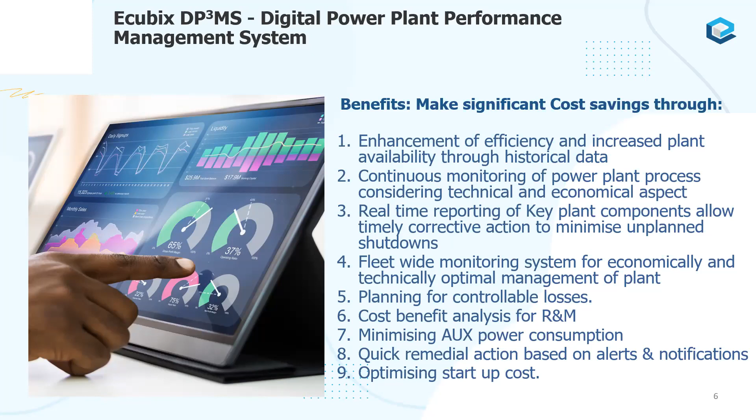Coming to the similar thing, if I present on the basis of departmental wise information, well, process efficiencies are derived in each department out of the real-time data capture, providing this data to each department in terms of reports specific to each department. So for management, we have generation report, state of the plant, CEMS dashboards, balance scorecard, etc.

For performance areas where the performance is being measured, well, boiler efficiency, APH input parameters, etc. In case of engineering division, we provide boiler trip, purge, feed water cycle reports, etc. All these kinds of reports are available. In operational areas, well, PA fan outputs, ID fans, the way they are working, secondary air, damper control, etc., drum level, everything would be available to you in real time, so that you can apply solutions then and there.

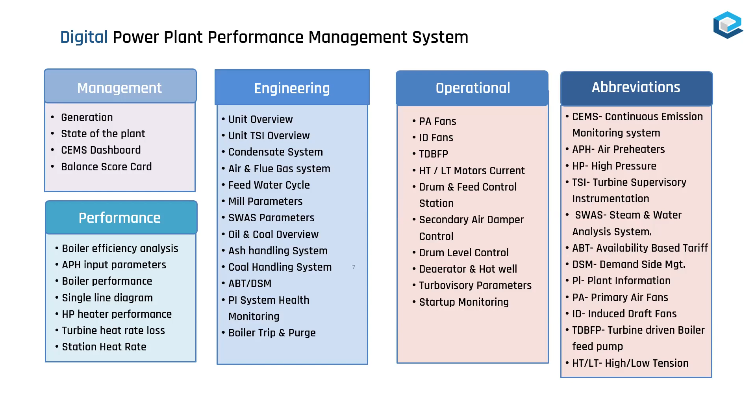Not that you are looking at past data and all that. Everything will be available to you quite much in real time.

So what will happen is you will now be able to see the condition of all your assets right in front of you, through your laptops, right? And there you can easily see what is the condition, and you can decide on when to basically apply the maintenance there.

So thereby you are able to reduce at least one scheduled maintenance cycle. This itself spells 8% cost reduction for an asset which is under monthly maintenance schedule, right? So even if I reduce one cycle out of 12, that comes to roughly 8% of benefit.

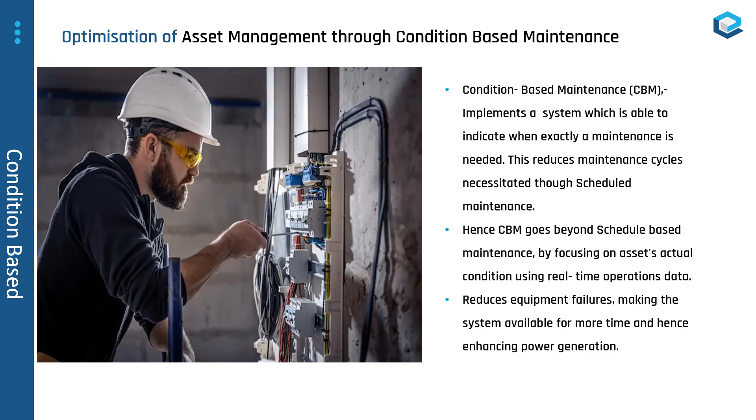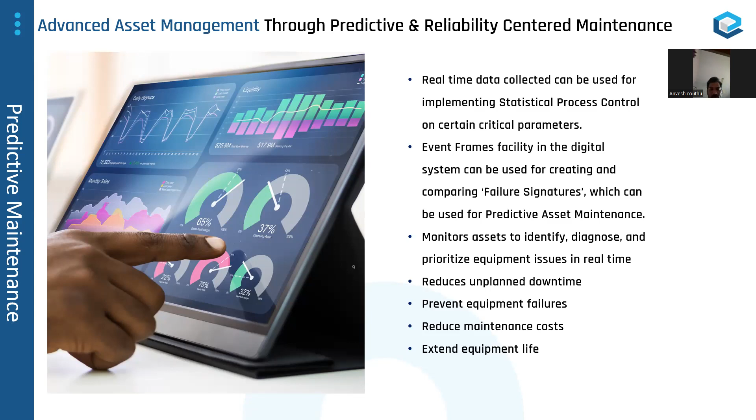Coming to next slide, as one starts getting trends from continuous data pertaining to assets, one can study the trends, build predictive trends, and apply preventive measures against failures and reduce unplanned downtimes. We also have an advanced tool for asset management through predictive analytics. That is, of course, over and above this tool, but it is always applied above the present tool which I am talking to you about.

Now coming to the part where, I would say, our execution process is also a very democratic process of executing. So we first initiate the project through a kickoff meeting, and after getting the idea of the scope of work in detail and allocating the project to the relevant managers and team people in our internal team, we visit your plant and validate against the scope of work which has been told to us.

If the scope is having a little bit here and there, then we get back to you and tell you that maybe you can increase the scope to this level or maybe reduce the scope. This gives a very practical understanding of the requirement.

When the execution phase comes, well, it involves deployment of product and a tailored solution. And we conduct in-depth training for the client for a seamless transition to the newly deployed system. This seamless transition is not only done for the management or senior management, we also do it for the last operator.

So until our operators are happy with our execution, well, I can tell you, you will not be able to succeed and you will not be able to drive any success from this platform. Last but not the least is the sign off when the project is finished, and we take a site acceptance test. This, of course, is common for all the organizations which will be implementing this.

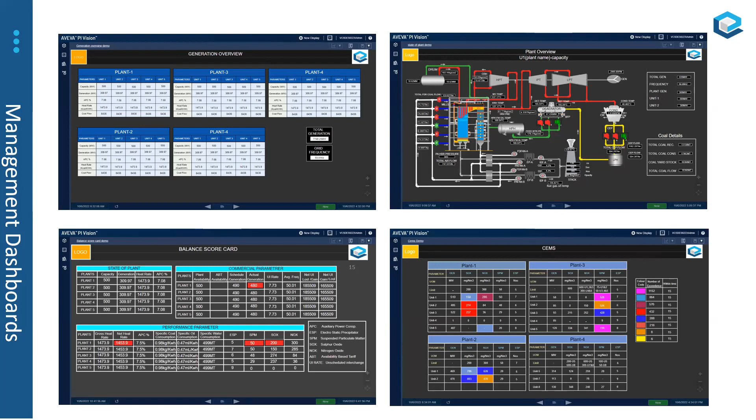Now coming to executed management dashboards, you can see these are the kind of dashboards which we provide to you, and it shows you a collective view of all power plants. It also shows important parameters of all the units in each plant, like capacity, generation, auxiliary power consumption, etc. So the benefits accrued are: business overview is available at a glance, information is available on the go, and real-time data for all plants and unit-wise are in one place. And all these dashboards are interactive, mind you.

When it comes to performance dashboard, not only throughout the organization, but we can also give you performance of each asset. This dashboard provides the overall performance of the equipment, for example turbine, boilers, cooling tower, etc. Performance of all critical equipment is provided in a single dashboard, and you can customize these dashboards.

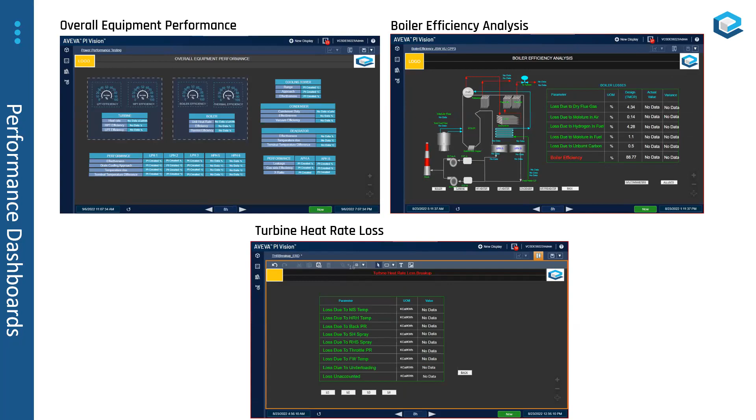This is a beautiful dashboard which we created for an organization. I have obliterated the name, but they have given us a lot of thanks internally. It was a very big client with thermal-based generation. This dashboard lets the operations team clearly understand where they stand vis-a-vis the demanded efficiency. The anomaly gets highlighted in real time, hence nearly instant corrections can be made.

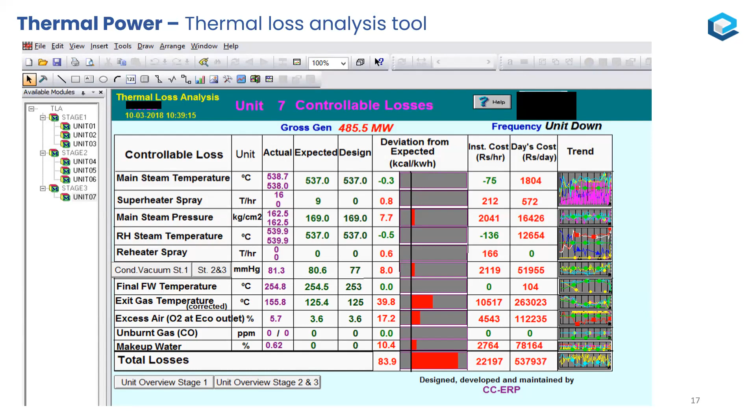Now I would like to come to the juice of what I have talked about - they say there is money, there is honey, right? So when I come here, I have to take recourse to international clients, because these people come forward and tell us what benefits they have accrued. Indian clients refuse to tell that in public, so I cannot reveal anything that has not been told in public.

So coming to AGL, it's an Australian Gas Light Company, a large power generation and gas supplying public limited company in Australia. Here you can see the benefits they accrued going from data blind to data driven, that's how they describe the journey. One of the testimonials by the head of asset performance, Mr. David Bartolo, says: the ROI is so ridiculously high that we struggled with our finance people, and the finance people insisted that there was no error in their calculations, right?

So this answers when people would ask me, Mr. Garg, what is the ROI you're going to give me? Well, this is the kind of thing which we get from our clients.

Heineken, it has nothing to do with the power. Of course, we know Heineken has a very famous beer. But why I put this forward is for condition-based management and maintenance. The testimonial by maintenance development engineer, Mr. Magnus Hobbaum, was very apt when he said the benefit is we can find a failure before it occurs, and then have a planned maintenance activity instead of an unplanned one.

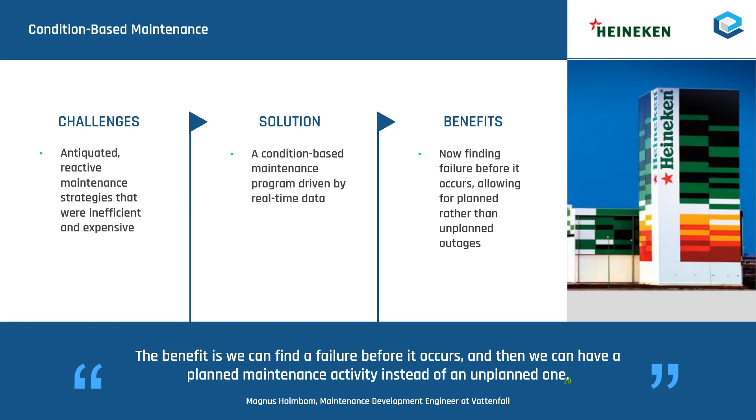Yesterday night, in fact, we received a mail from one of our very big clients thanking us. They said this has to be treated confidentially, so I cannot name them. But they were able to control the failure of their motor in a batch, which was very expensive. If it had failed, it would have been equal to all the implementation costs they have incurred with us for 4 years till now.

Coming to my next one, this is Ansaldo Energia, a power generating company in Italy, Genoa. This use case highlights how data collected from various assets converge into finite templates, enabling data-based decisions throughout the organization. The diagnostic systems technical leader, Mr. Sandro Gollini, says the result is one unique platform.

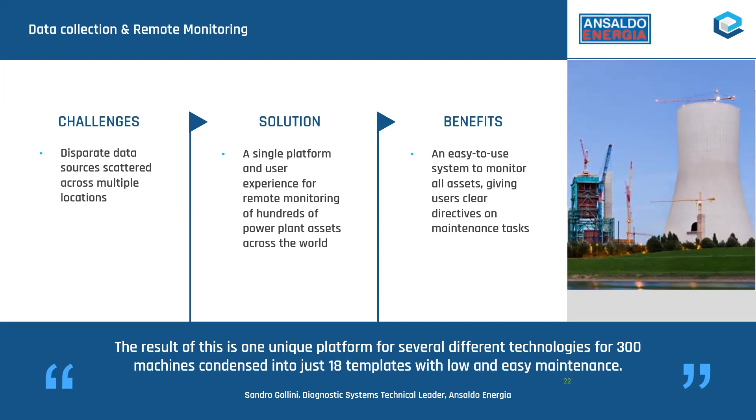And last but not the least is our own India operations of Tata Power. Tata Power is one of our most prestigious partners in their digitization journey. We have integrated all the thermal units into a single grid. The same for the green assets is underway. All this integration was done within a record time without the loss of even one string of data.

This was unthinkable, that's what Tata Power people told us. And Mr. Urvish Modh, not a small personality, group head maintenance, highlights our top level service commitment through this testimonial.

He talked about our gentleman, I've removed the name of course. This gentleman attended the emergency site visit and completed the task in minimum time. He faced many issues to revamp the system. His approach for finding resolution was very good.

This happened in a very odd hour during Diwali holidays, and this guy traveled from Gujarat immediately to Mumbai, and he was able to give them an instant solution.

And recently we have also been awarded by Tata Power the first implementation of data diode solution in Tata Power. In India, actually, that is the first implementation of this kind of technology used especially for cybersecurity.

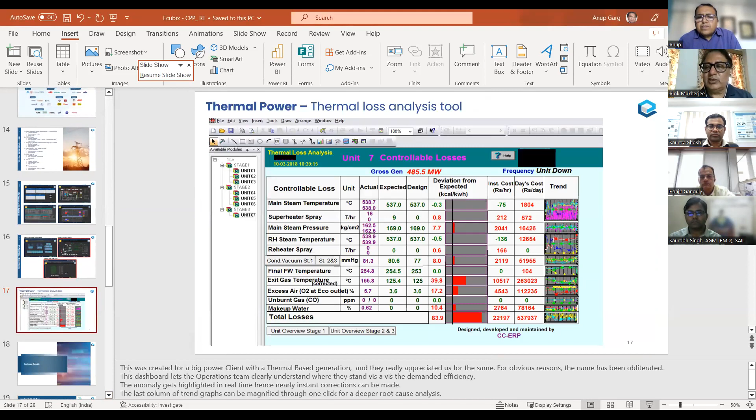Now the controllable losses are basically dependent on the temperature, on the parameters which are on display. Sir, look, you can see it. I'm sorry to interrupt, you can see the slide. Yeah, we can, thank you very much.

So what we can say is there are certain parameters which are controllable, like main steam temperature, spray pressure, reheat temperature, reheat spray, and they have a lot of bearing on the heat rate or efficiency of the plant on a real-time basis.

Now these things are of course also available in the control room. But the good thing about digital transformation and Industry 4.0 is that there is a democratization of this data. So this data is now available not only in the control room, but also to the plant manager, to the maintenance head, and in cases where there are multiple units, it is also available at the corporate center.

Another good thing about these digital interventions is that they are all time stamped and there is a big historian, so this data gets accumulated over a period of time. And so I come back to one of the key words mentioned by my earlier speakers, that is analysis. Now analysis can only happen if we have a continuous flow of data and information, which can be stored, retrieved and analyzed.

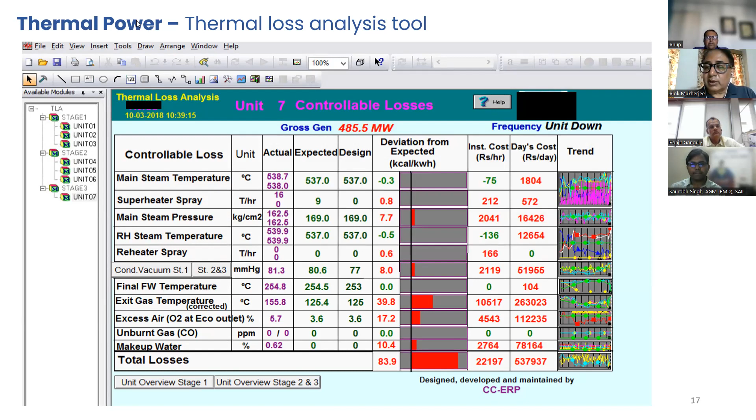This type of instrumentation or data analytics not only provides us alarms and notifications if values are coming to the upper control limit or lower control limit. That is fundamental, that we should have.

And as Mr. Anup was saying, we have the added advantage of giving graded notifications, so notifications can come to all stakeholders via SMS or email whenever those limits are reached. That is one part. But the main thing we are focusing on, as some of my previous speakers highlighted, is that there has to be something beyond that, when the value reaches an alarm and very soon will reach the breakdown value. So that is only the first part.

So now there are tools available, over and above what we have, by which the early stage of damage can also be seen. We can use various pattern recognition, mathematical models, data analytics, by which even the early stages of failure can be predicted, and thereby we can generate a notification.